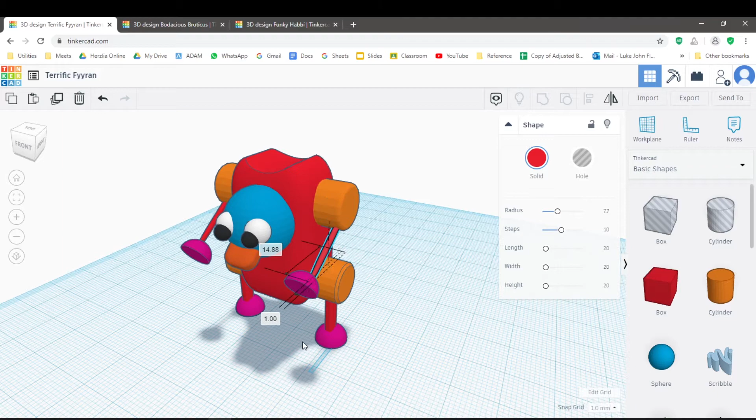The first one I want to show you is the first one that I made as a prototype. You can tell it's not super great - these arms are a little flimsy, these hands don't really make sense, and they're maybe not aligned so well. They're a little bit off to the side, and it's okay. I wouldn't give this a failing grade - this would be a pass, but we can take this a little bit further.

You can see over here I've got a cutout in the top. That's great, but I think we can take this a little bit further - we can make this a little bit more detailed.

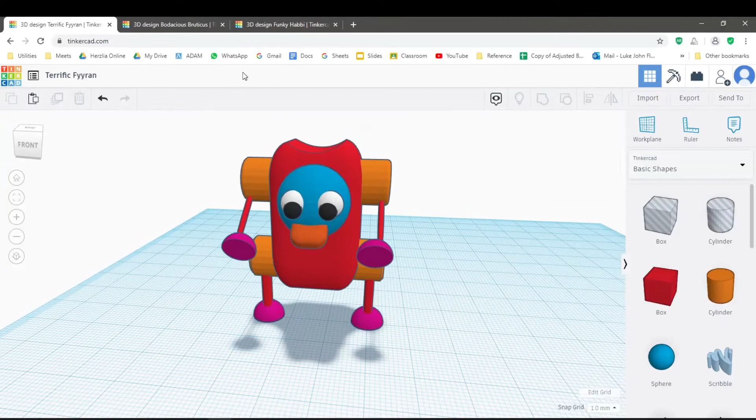Let's take a look at the next robot that I made after this one, which I put a little bit more time and effort into. You can see I added some shoulder joints.

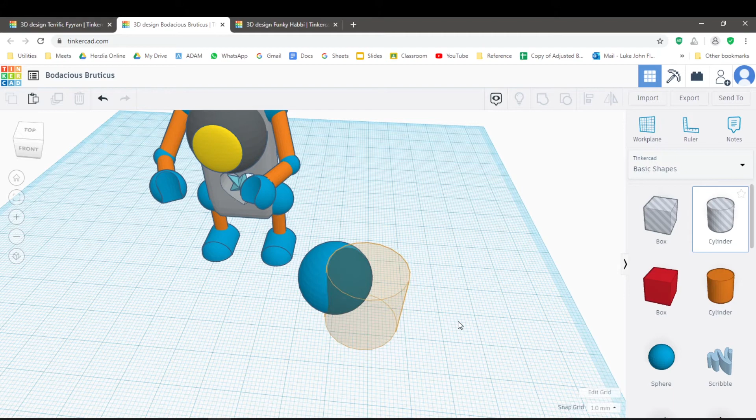What I did was I took 2 spheres and then used the hole cylinder to cut out a hole like that, and then I selected both of them and grouped them so that I had somewhat of a claw for my robot to use. Then I scaled that appropriately to the right shape and size, and just raised it into place.

So I'll just trash that. You can see how you can very easily use all the skills that I've been showing you to make something quite detailed and quite complicated.

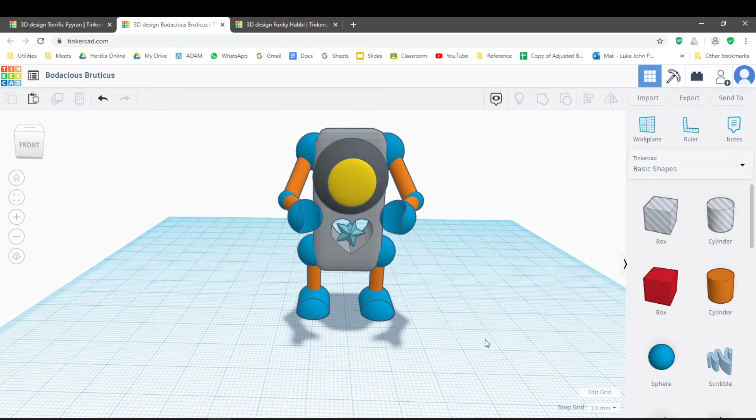You can see down here as well, even just the shoes, these feet started as round roofs, and then I added a sphere to the end of them and made them the same color and grouped them together. So you can do that.

Just before I end, I want to show you one more example of a design you can go with, this one over here. You can see this one's not got a lot more detail than the previous ones, maybe as much detail, but with this one I've really gone and put a lot of effort and work into making it as neat and symmetrical as possible.

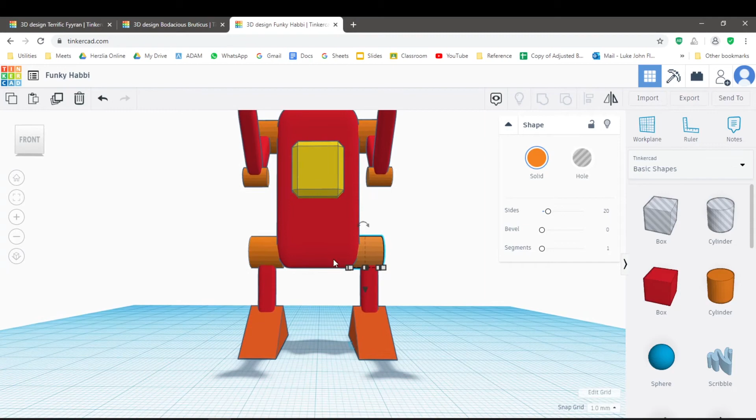If you take a look, each of these arms and limbs and everything is more or less in the same relative place as it is in the other one. Maybe these limbs are a little bit off, but I can move that out, and now that looks much more perfect. I wouldn't want one limb over here and another over here, because that doesn't look right. Take a little bit of time and effort to make sure it's looking nice, neat, and symmetrical.

Just another thing I want to show you here, with these claws I did the same thing with the hole cut out. But something worth noting is what you might find yourself doing—let's bear with me a second, I'm actually just going to select and delete all of this arm over here.

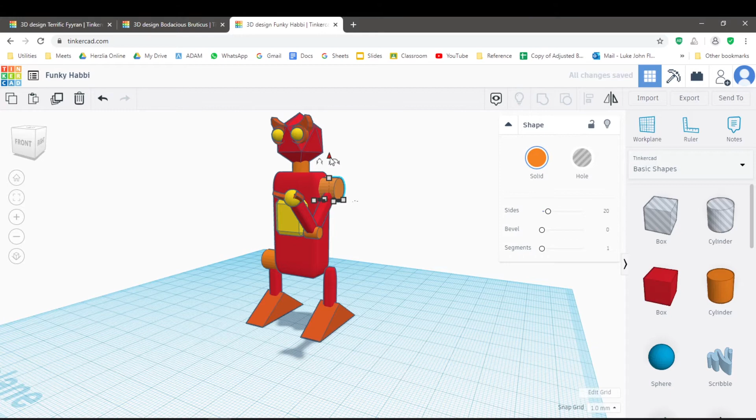What you might end up doing, and what I'd recommend, is maybe start by building the arm, and then duplicate it and lower it down so it's in the right place. We can save time doing actions like that. But one really great action that saves a lot of time is to just build one arm and then use the duplicate and mirror function.

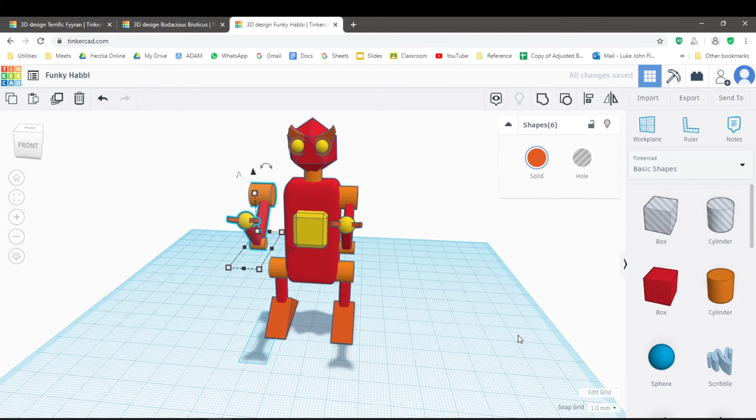So I'm going to select this arm and duplicate it, then move it over so it's on the other side. And then watch this—I'm going to mirror it so the shoulder joint flips to the other side. And there we go, now it's perfectly mirrored and I can just bring it into place. There's the other arm, perfectly replicated.

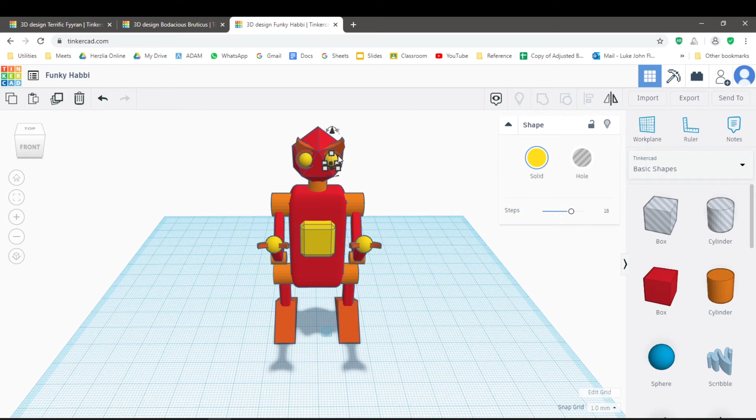You can do that with any object on your robot. If you only want to make one half of the face, duplicate it and put it on the other side—that's a really good way to do that. That's what I did when I made these feet: I only had one set of feet, then I duplicated them, moved them over, mirrored them, and put them back into place.

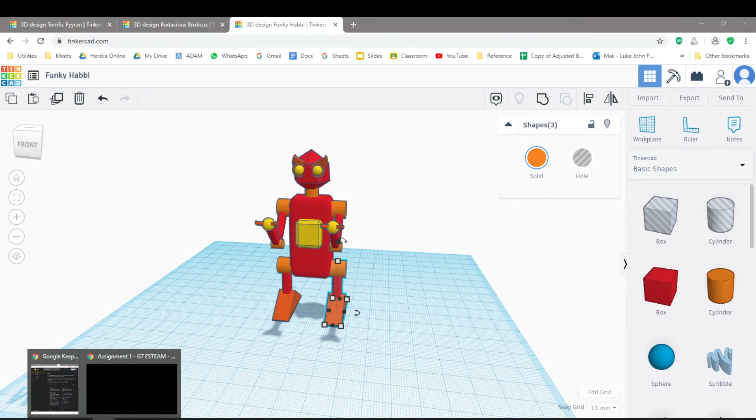And it worked perfectly. So that is your assignment one. Just follow the guidelines and the rubric I've given you, and take your time with it. You've got the whole week to do it. Maybe do it in a couple of sessions, put a little bit of extra effort in, and see what you can come up with.